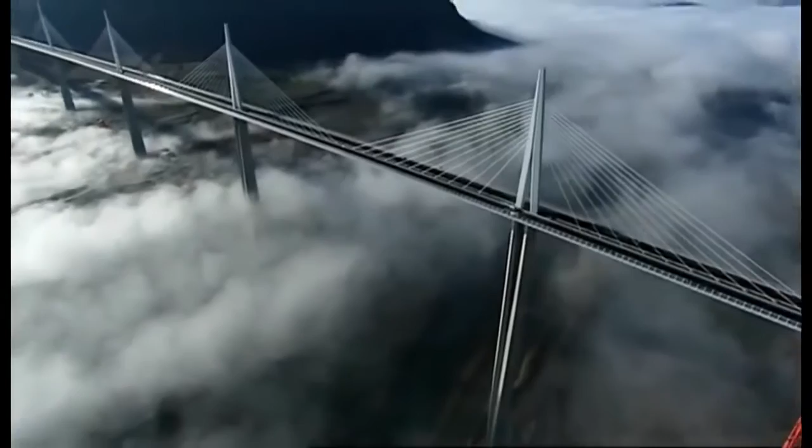This is the Millau Viaduct, the tallest bridge in the world. Its highest tower stretches a staggering 343 meters. So high, the bridge glides above the clouds. But this is a megastructure they said couldn't be built. When I've shown first the drawing of this bridge, they really thought I was crazy.

The team attempting to build this amazing freeway in the sky had to survive landslides, fight winds gusting at 130 kilometers an hour, and weather massive storms as the bridge simply hung in the balance. It's a bridge that pushes the boundaries of engineering to the limits, and then beyond.

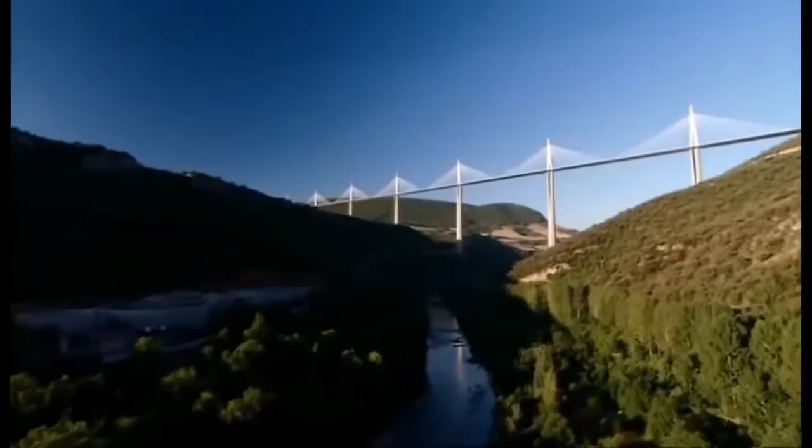Imagine building a series of Eiffel Towers, then slinging a 4-lane highway between them, all the way across one of the deepest valleys in France. Impossible though it sounds, that pretty much describes the building of the Millau Viaduct.

From the start, the construction team faced 3 daunting challenges. 1. Build the tallest bridge piers in the world. 2. Put a 36,000-ton freeway on top of them. And 3. Erect 7 steel pylons, each weighing 700 tons.

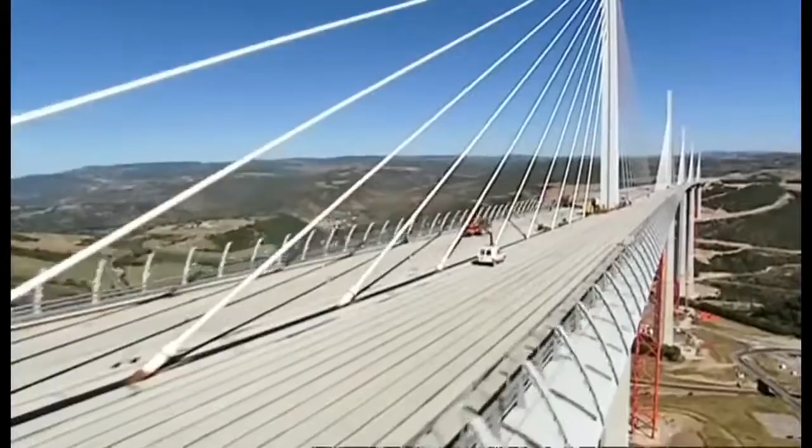And what's more, they had to do this hundreds of meters above solid ground. So high that if you were on top of the Eiffel Tower, you'd still be looking up at this awesome bridge.

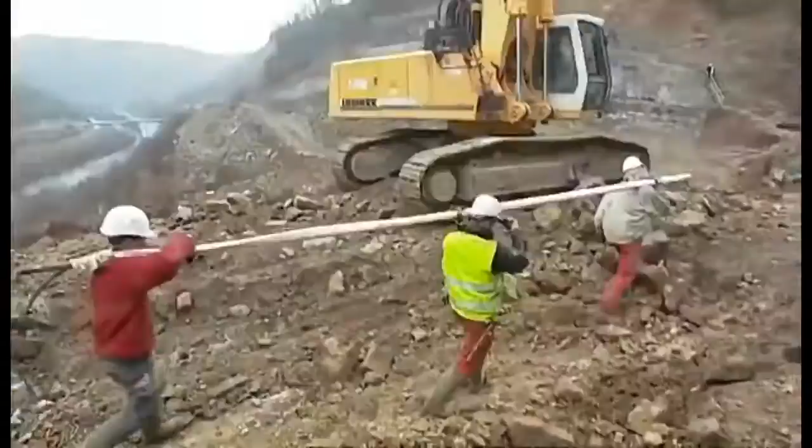October 2001, the team break ground. They're required to build a bridge that'll last for 120 years. And to win the contract, the teams promised to build it in record time, less than 4 years. By comparison, the world's longest suspension bridge, the Akashi Kaikyo in Japan, took a full 10 years to build.

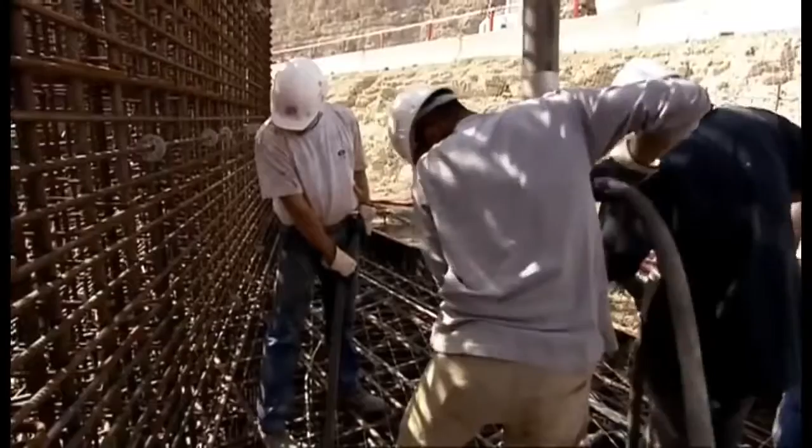To up the ante, any delay will cost them $30,000 a day in penalties. There are 7 piers that are numbered from the northern end of the valley. Number 1 will pose problems because of the steep slope. Number 2 will be the biggest challenge since it's the tallest. Crossing the river, number 3 is not much shorter. Then 4, 5, 6, and 7 climb the gentler slope to the south.

To begin, the team had to bury the foundations deep in the bedrock in order to support the enormous weight the bridge will place on them. But the forces of nature were stacked against them.

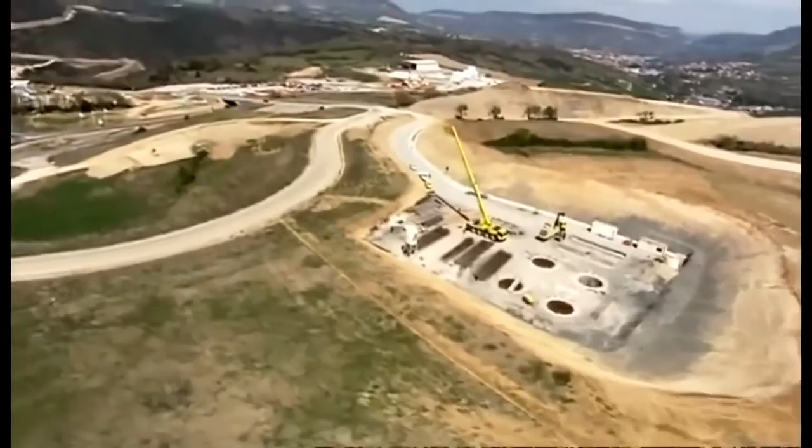Geologists have warned of the risks posed by the region's fractured limestone. The rock is full of cavities that are essential to the local cheese economy. These cave systems, close to Millau, are home to a unique bacteria responsible for the blue mold in the world-famous Roquefort cheese. But what's perfect for cheese could be disastrous for a megastructure.

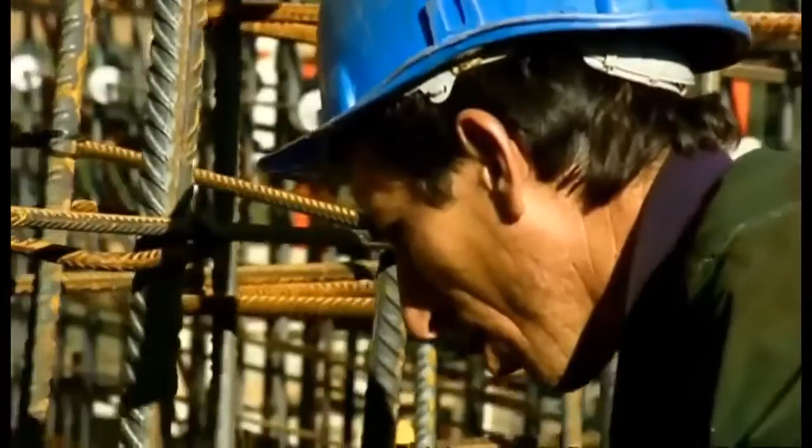The geologist's diagnosis spelt one thing: landslides. This kind of catastrophe could jeopardize the entire project. Despite the warnings, building went ahead as planned. Then, well into construction, as predicted, a dramatic storm causes a landslide. 4,000 cubic meters of rock collapse around Pier 1.

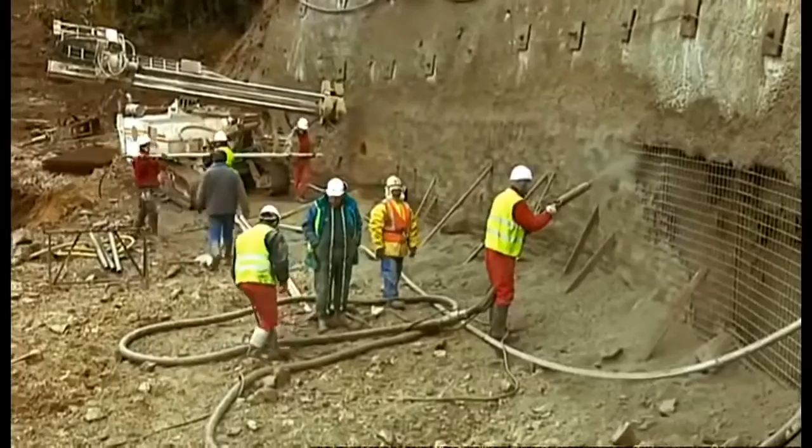Fortunately, the fallen rock doesn't damage the pier, but the warning is clear. They're forced to divert precious manpower and equipment to stabilize the slope and prevent a repeat collapse. So if the area is prone to landslides, why did they build the world's tallest bridge here in the first place? The answer is simple.

In the 1980s, France built a freeway linking Paris directly with Spain. This major artery headed south across the French countryside, while from the Mediterranean, the freeway headed north, until they both hit one of the deepest valleys in France and stopped dead. Welcome to Millau, France's least favorite bottleneck.

The town of Millau is in the mountainous region of the Massif Central, one of the most tranquil parts of France. But in summer, this poor medieval town suffered traffic hell. The locals couldn't take it anymore. Neither could their mayor. It was terrible for our reputation. When you hear every day on the television and radio, avoid Millau, there's a traffic backup, a 5-hour wait in Millau.

And it's not just the people of Millau. Two drivers, Jamila and Jemima, crossing the 30-odd kilometers between the freeway on either side of Millau, reveal exactly why this bridge is needed. Jamila, in car 33, will cross the new bridge, while in car 22, Jemima will take the old road across the valley floor.

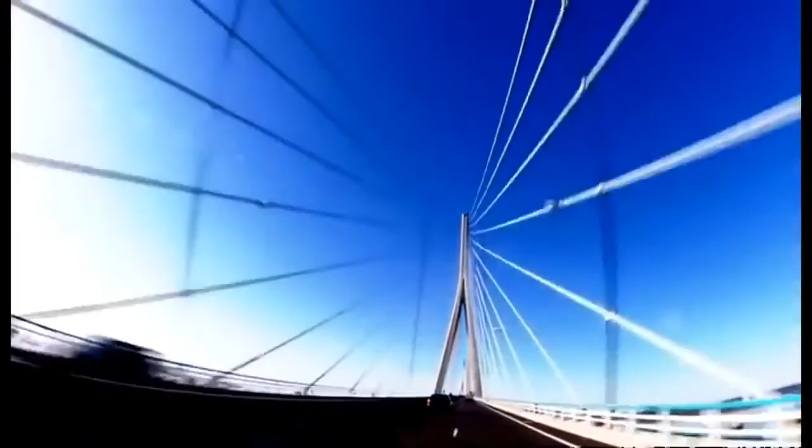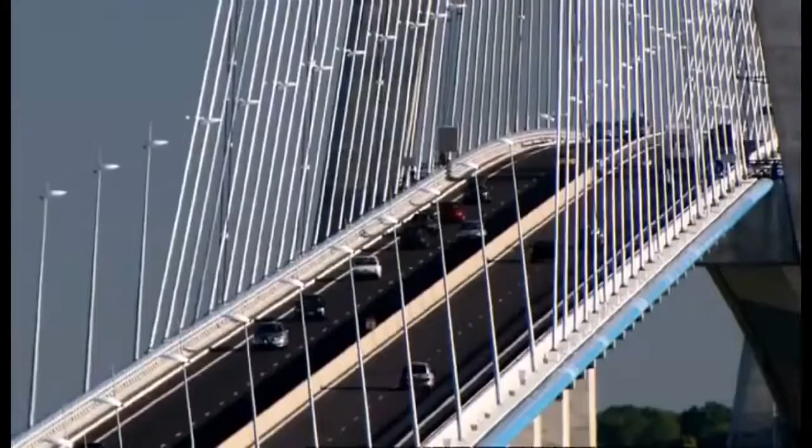Virlogeux's Normandy Bridge has 2 sets of cables supporting the deck. But he wanted to up the stakes for Millau by losing 1 row of cables, so the remaining line would be forced to do twice the work. More dramatically, the 2.5-kilometer Millau Bridge, instead of having a single main span, needed a whole series of piers to support it across the valley. No bridge builders had ever attempted a multiple-span, single-line cable-stay bridge on this scale before.

The French authorities had a problem. Nervous about Virlogeux's groundbreaking scheme, they held a competition inviting other engineers and architects to compete with different designs. The winner, Lord Norman Foster, is one of the world's superstar architects. In Hong Kong, he built the world's largest airport terminal. In Barcelona, offices literally hang from a mast on his communications tower. This is a man who regularly contemplates the impossible and delivers.

You know, it's the challenges, and it's one challenge on top of another, on top of another. And with Millau, one of the biggest challenges was making it fit into the landscape, given it's just down the road from the famous Gorges du Tarn, France's equivalent of the Grand Canyon. How do you make something which has to be so immensely strong against the forces of nature look very gentle, very delicate? How do you weave something on that scale into the most unbelievable landscape?

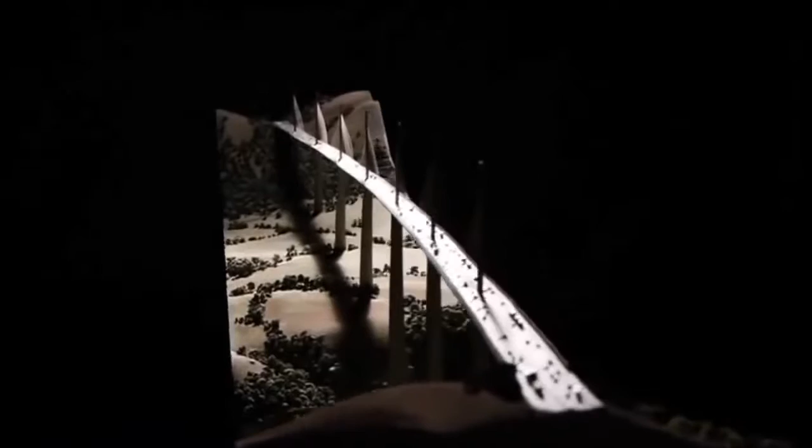Ironically, Foster's answer was to take Virlogeux's pioneering scheme, then push it one stage further. He turned an elegant piece of engineering into a delicate work of art by boldly cutting out 2 of the 9 original piers and seriously slimming down the remaining piers and road deck. Foster wanted the bridge to appear as delicate as a butterfly, but this butterfly has to support the weight of 5 Eiffel Towers in gale-force winds hundreds of meters above the River Tarn. Getting the design wrong would be a disaster.

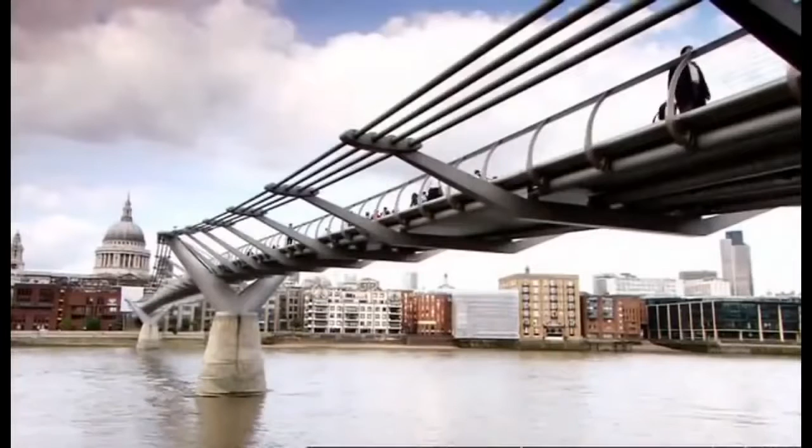Then, with Millau still on the drawing board, Foster's record as a bridge builder suffered a major setback. His Millennium Bridge in London is actually another record-breaking structure, the lowest profile suspension bridge in the world. But when this footbridge opened to the public in June 2000, it was a public relations disaster. Crowds walking over it set up a resonant frequency, and the bridge began to sway. As people adjusted their step to the small initial wobble, the effect was magnified.

Though it didn't threaten the structure, the swinging motion became so dramatic, the authorities closed the bridge for a refit that took 1.5 years and ended up costing over $8 million. It was a bad omen for the Millau Bridge, where construction was soon to begin. And at 15 times the height, a design flaw would be a catastrophe.

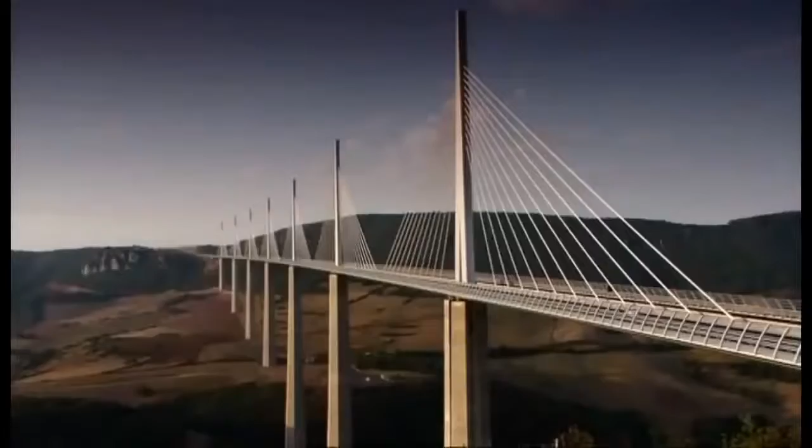December 2001, France's Millau Viaduct, the tallest bridge in the world, is under construction. Everything about this project is supersized. It'll need 200,000 tons of concrete, so much that the team have to build a concrete factory on site. But there's nothing straightforward about this concrete. The formula must be just right. It needs structural strength to support the massive loads it'll have to bear.

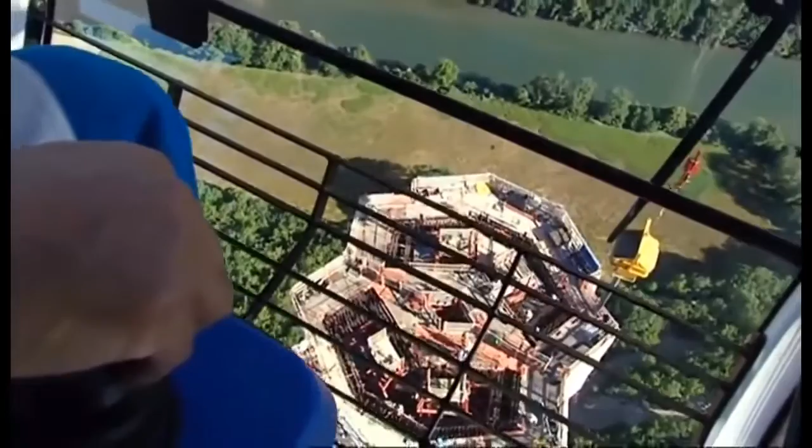But it can't set too quickly, as it has to be hoisted into position and poured hundreds of meters in the air. And it needs to be just the right color to suit Norman Foster's vision. In fact, the architect's vision has created a headache for the construction team. He's designed each pier as a complicated geometric shape, tapering the entire way up with vertical grooves set into them to create shadows. But what's just a line on paper for the architect was a major challenge to build.

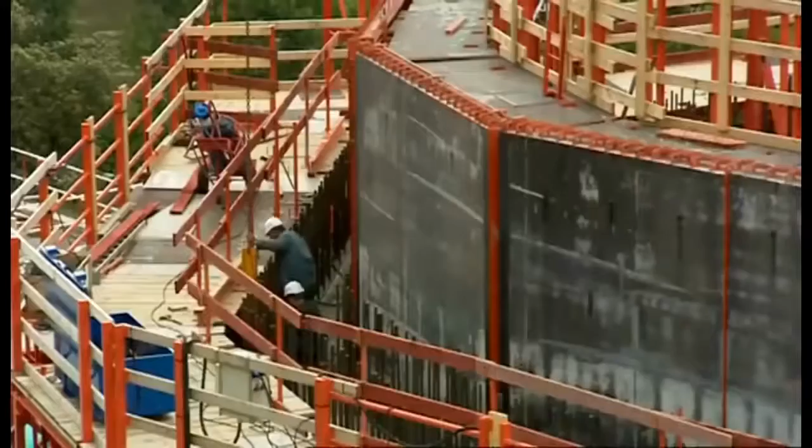The enormous piers are built step by step by pouring concrete into a temporary mold. To give the required strength, the molds are filled with a frame of steel reinforcing bars. In total, 16,000 tons of these steel bars are hoisted into place and secured. Laid end to end, they'd stretch the 4,000 kilometers from Millau all the way to Central Africa.

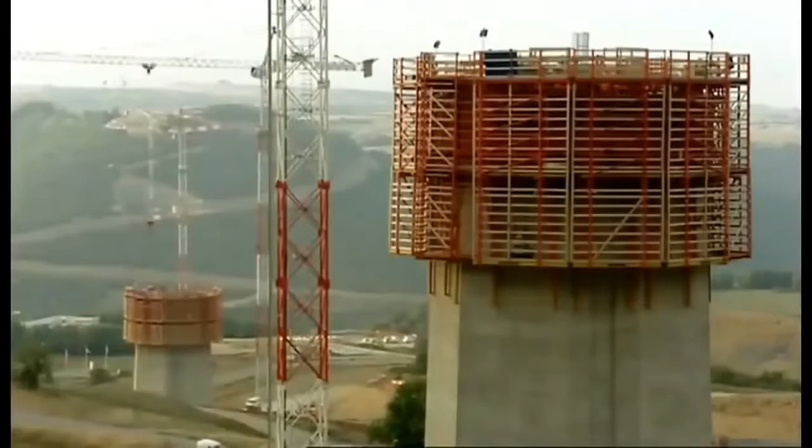The shape of each pier is seriously complicated. As a result, each time they remove the sections of red steel shuttering, they have to change the shape of the mold to fit the profile of the next 4-meter section. Manhandling these steel panels, weighing up to 15 tons apiece, is no picnic. And with the combined height of the 7 piers totaling well over 1 kilometer, they have to change the shape of the mold over 250 times.

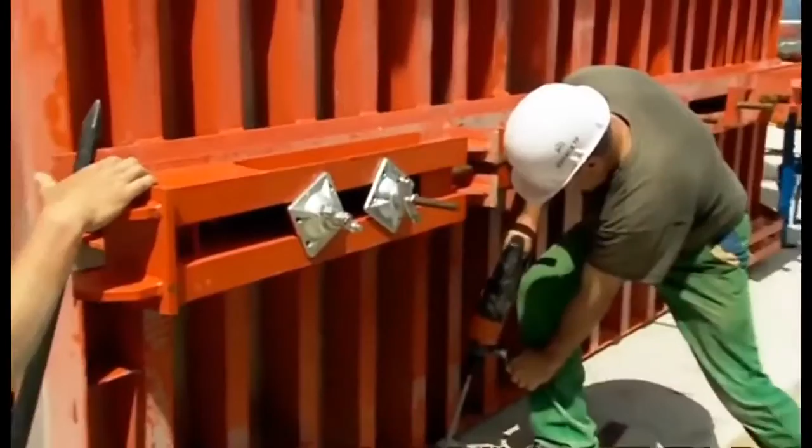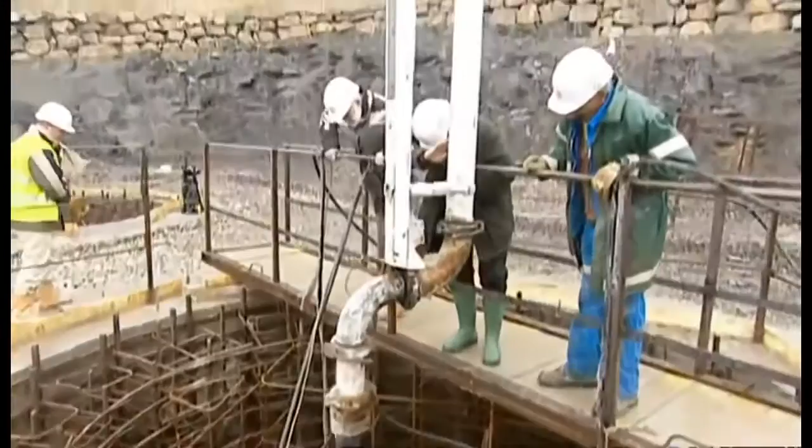Every 3 days, each team on each pier went through this whole cycle. Then they repeated the process. But it was a race against time, with a permanent threat of delay. Keeping the entire build on time and to budget was the daunting responsibility of one man, Jean-Pierre Martin. If instead of 3 days we took 4, imagine that multiplied by the number of castings. We'd end up with a 3 or 6 month delay. With a penalty of nearly $1 million a month, this isn't something Martin wanted to contemplate.

And this schedule wasn't his only headache. You have to be pinpoint accurate when you're building the tallest bridge piers in the world. Get it wrong, and the bridge simply won't fit together. Just 10 centimeters out, about a hand's width on each 4-meter section, and the tallest pier could be 6 meters off at the top, the width of a jumbo jet fuselage.

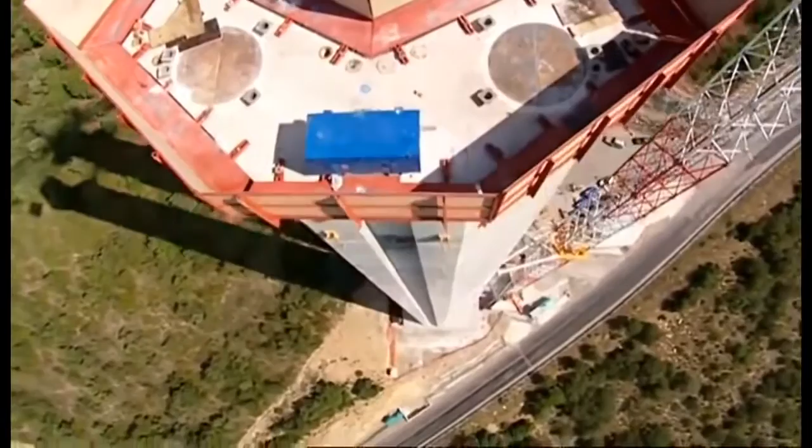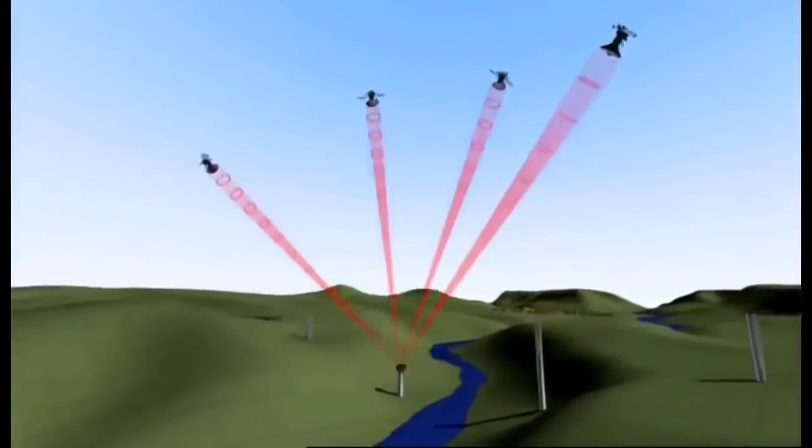Each team was aiming for a specific point in the sky. For Pier 2, this was exactly 245 meters above the ground, 546 meters from the north side, and 1,914 meters from the southern end. There was no room for error. The only chance they had to get it right was with GPS, accurate to within 4 millimeters. Using signals from multiple satellites, the team could pinpoint their position and make sure they're on target for that critical point in the sky they needed to hit.

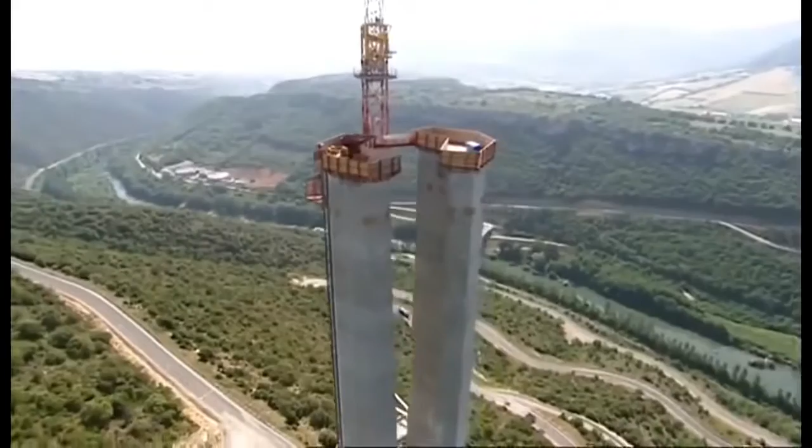Month after month, the piers climbed higher. Finally, by November 2003, they reached their full height. At 245 meters, Pier 2 becomes the highest bridge pier in the world. But is this record-breaking pillar where it's supposed to be? Amazingly, it's dead on target, to within 2 centimeters. Champagne corks pop. It's time for a major celebration. Against all the odds, they were 1 month ahead of schedule, but the team couldn't afford to relax. The next stage of the project would be the most difficult part of the build.

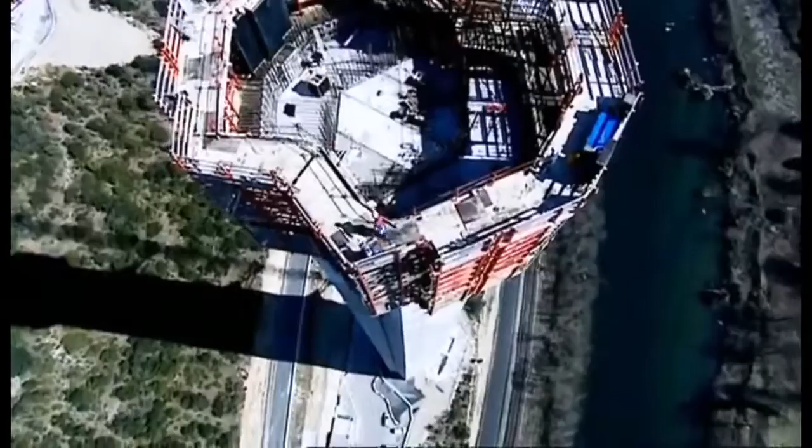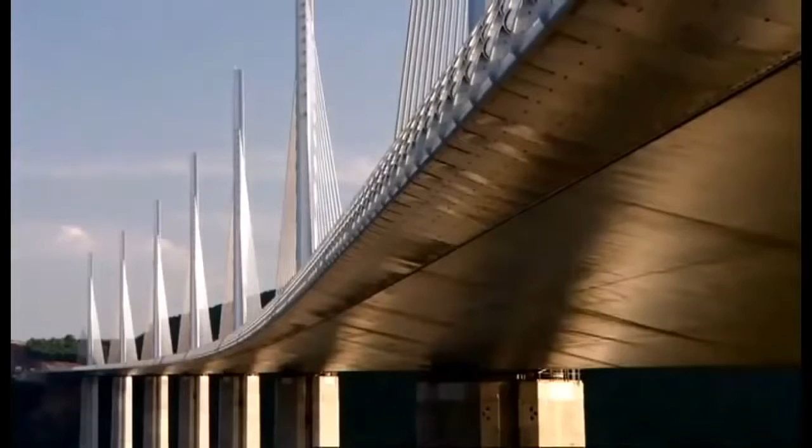With these fatalities in mind, the team decided to fabricate the entire road deck on the safety of solid ground. This meant building it in steel, which in theory would be much safer than lifting vast concrete sections hundreds of meters into position. There's only one problem with this plan. No one had ever put a road deck on piers anything like this height before, let alone over a 2.5-kilometer span.

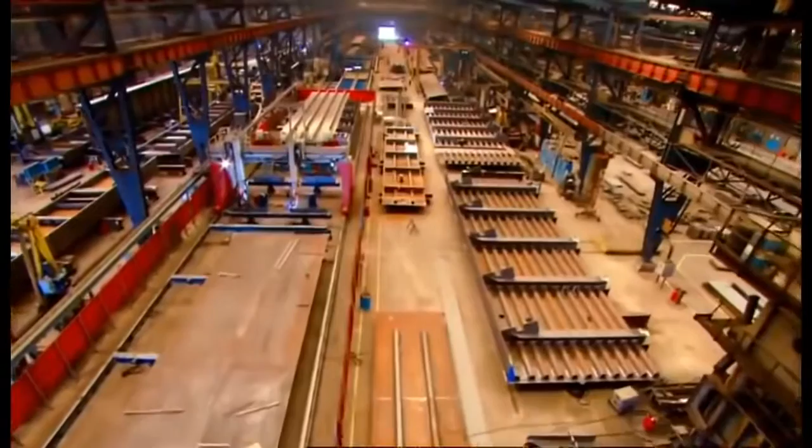In the end, only one steel manufacturer had the courage to take on this colossal challenge. Eiffel, the steel firm set up by the great French engineer. Eiffel built what was once the tallest bridge in the world, the Garabit Viaduct in southern France, before getting round to the framing for New York's Statue of Liberty and, of course, his signature tower in Paris. But despite the company's experience, Eiffel's director, Marc Buonomo, knew he was taking a serious risk. It was a gamble for the company, because if there had been a mistake, if it hadn't worked, it would have been the whole company.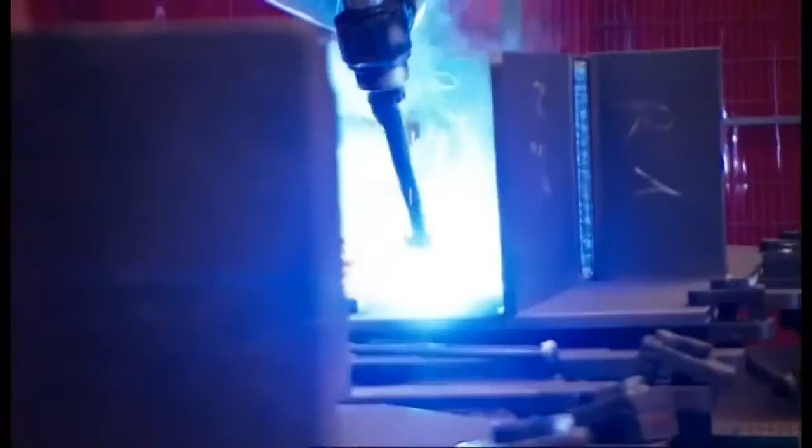They fabricated the massive sections that would make up the road deck in the company's steel factories. This immense jigsaw puzzle involved manufacturing 2,200 separate sections, weighing up to 90 tons, and some of them 22 meters long. Their accuracy is measured with a laser to within a fraction of a millimeter.

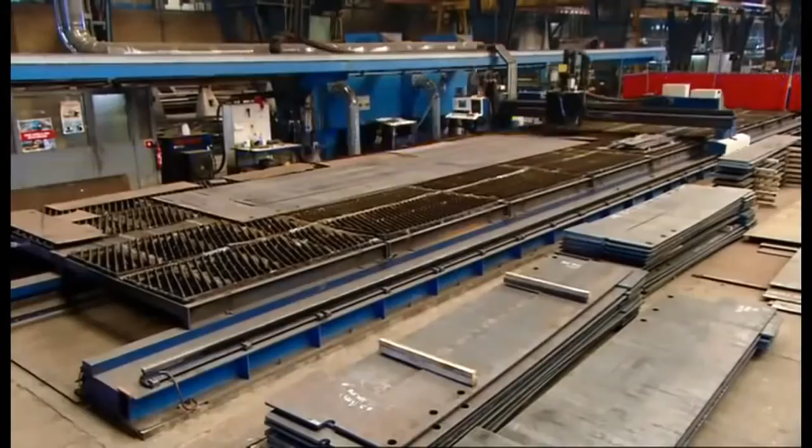The huge square tubes are the central spine that should make the deck rigid. The triangular side panels will be welded on either side to create the width for a 4-lane highway. To meet the punishing schedule, Buonomo automated the manufacturing with a 2-headed welding robot and a plasma cutting machine.

Each cutting pattern or template is programmed into the computer. Then the machine automatically blazes its way through the steel. The torch reaches a scorching 28,000 degrees centigrade. That's 5 times the temperature of the Earth's inner core.

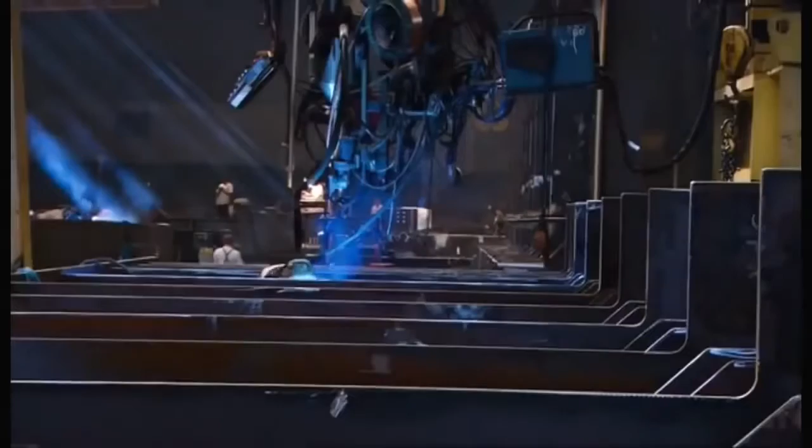But cutting and welding was the easy part. The hard part was getting these monster sections the hundreds of kilometers from the factories to Millau. The routes had to be planned with precision to avoid major damage. The police coordinated safety and clearances. Even with that level of preparation, some obstacles felt as if they're cutting it just too close for comfort.

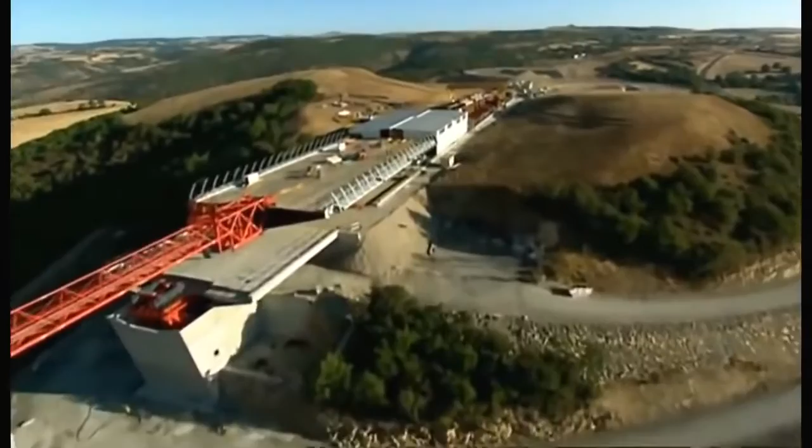And this was no one-off event. To build the viaduct took over 2,000 of these extraordinary road convoys. The components arrived at assembly plants set up, one on either side of the valley. Here, the pieces of a massive jigsaw puzzle were welded together to form the 2 halves of the deck.

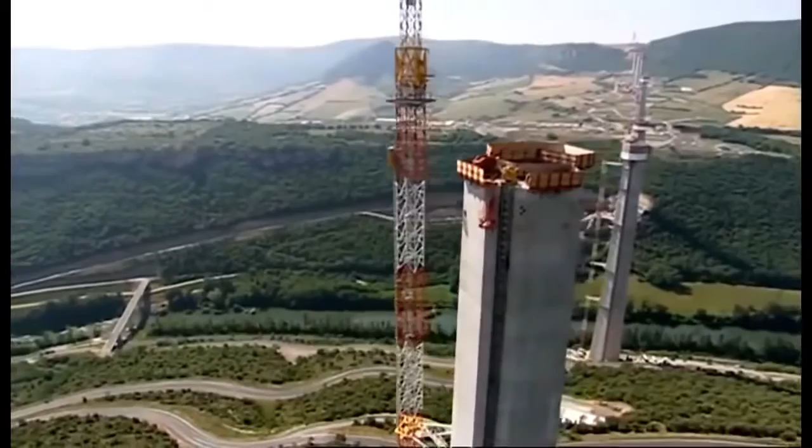But getting these 2 halves to span the valley on top of the world's tallest bridge piers would be a major challenge. They'd be the first team to put a road deck on a pier taller than an 80-story skyscraper. And pushing bridge building beyond anything attempted before, they planned to slide the entire 2.5-kilometer road deck over in 2 colossal pieces. The bridge's chief engineer, Jean-Marie Cremer, was one of the few people who believed it could be done.

All the engineers who know this method, who were in the know, didn't believe it was possible. If the team had got their calculations wrong, the entire structure could collapse into the valley. We found a solution for the construction, which was to launch the bridge from the 2 sides. One part on the Larzac Plateau, one on the Rouge Plateau. And to push them from the 2 sides and to make them come and meet here above the River Tarn.

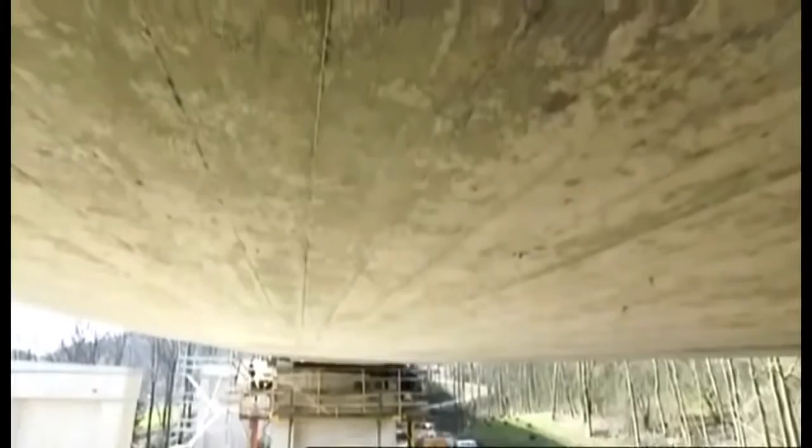Smaller bridges use a similar technique. A powerful set of hydraulic rams literally pumps the deck from one side to the other. But Millau would be the longest launch ever attempted over the highest piers in the world, and the results could spell disaster. The deck is so slender, it would bend and collapse if it were pushed out over the 342-meter spans between each pier. The furthest anyone's previously managed is less than half that distance.

The first part of the solution was simple. Fit a pylon so its cables support the front of the deck as it goes out over the valley. Then construct temporary steel support towers that halve the spans to a more manageable 171 meters. These steel towers were a construction feat in themselves. The largest, over 170 meters high, is the tallest ever built, and they needed to carry a massive load.

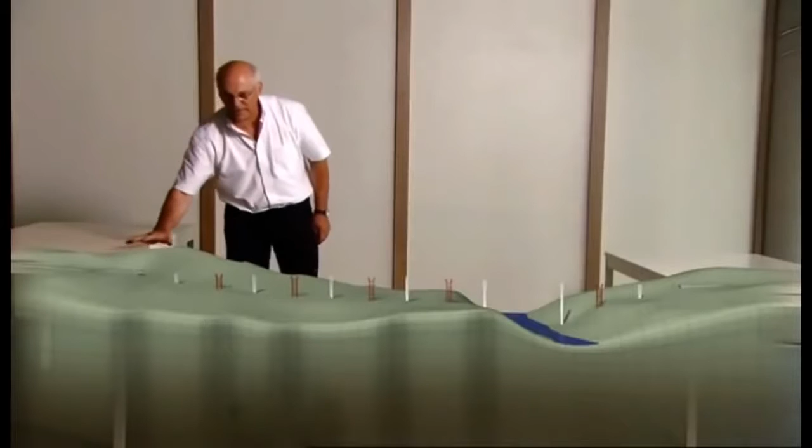7,000 tons as the leading edge of the deck, together with the first 90-meter pylon, slide over. And simply pushing this enormous weight over the top of the vulnerable piers would bring them crashing to the ground. This was the nightmare scenario. If we'd done a conventional launch, we would have knocked the piers over like the pins in a bowling alley.

Someone needed to reinvent the way this type of bridge is built. And it's Marc Buonomo with Jean-Marie Cremer who came up with the breakthrough. The basic principle can be demonstrated with a heavy box and a wobbly table.

With a normal launch, you knock over the piers. I want to advance the deck over the pier, but if I push the deck from here, I'd knock over the piers, because they're so tall.

The idea is to install a launching system on top of the pier, and that way, if I push the deck, it has no effect on the stability of the piers, and the piers won't fall over. The trick is to use a series of these launching systems to jack up the deck and inch it forward.

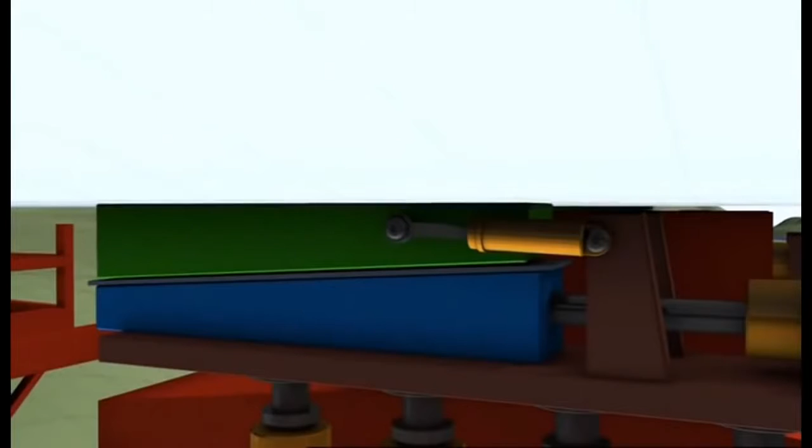Each system uses two wedge-shaped blocks under each side of the deck. The upper wedge is pulled forward by a hydraulic ram. It slides up the slope of the lower wedge, at the same time lifting the deck from its supports and advancing it 600 millimeters. The lower wedge then retracts, dropping the deck onto its supports. The upper wedge returns to its original position, and the whole cycle begins again.

4 of these clever devices are placed on each pier, all programmed to work at exactly the same time. The result is that together, they pick up the entire roadway and shunt it forward. But if one fails or gets out of step, it could spell disaster. The force could push the bridge piers apart till they collapse.

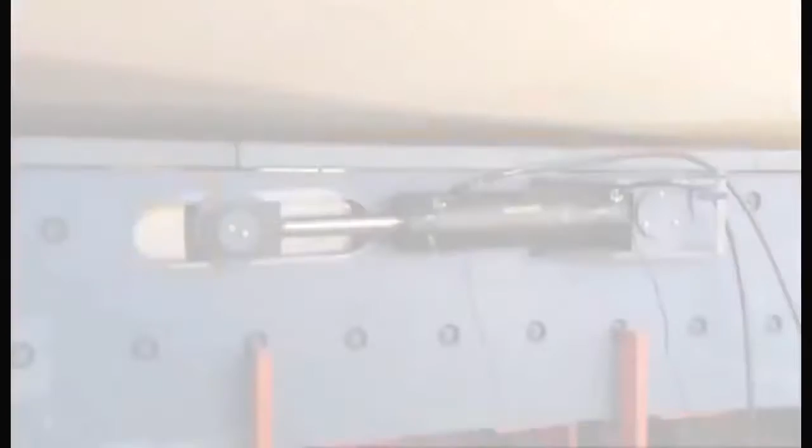When you're up there and you see Millau 300 meters below you, you ask yourself, was this a good idea? The future of the entire project was now hanging on a prototype, and it had never been tested.

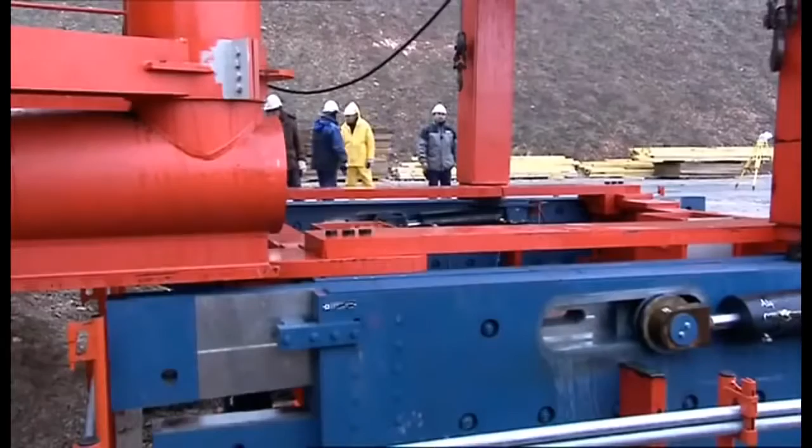It's the morning of February 26, 2003. Do or die day for the world's tallest bridge. Everything is about to be put to the test. The flexibility of the deck, the strength of the temporary piers, and critically, the pioneering hydraulic ram system. Even Buonomo, the man in charge of the launch, had his doubts. As it had never been done before, I have to tell you, I had fears that it wouldn't work.

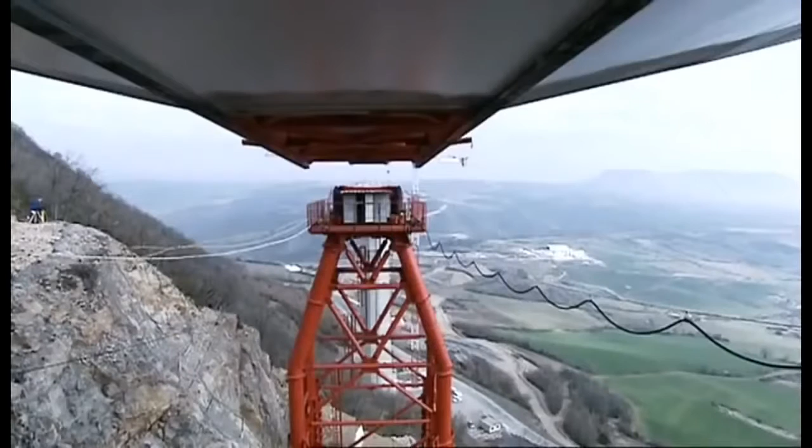The pumps kick in, the pistons start to push, and the deck begins its huge journey across the valley. The moment I heard the motors start, I put my finger on the deck, and I could feel my finger move. Every 4 minutes, the deck advanced 600 millimeters across the valley. Surveyors tracked its progress. But it was still a nail-biting time as they watched the unsupported deck crossing the void.

Eventually, the deck reached the safety of the first pier. 204 meters down, only 2,256 to go. The launching system seemed to be working as planned. The engineers were feeling optimistic. But as the deck advances into space, it'll become more vulnerable to the wind, which can reach 130 kilometers an hour.

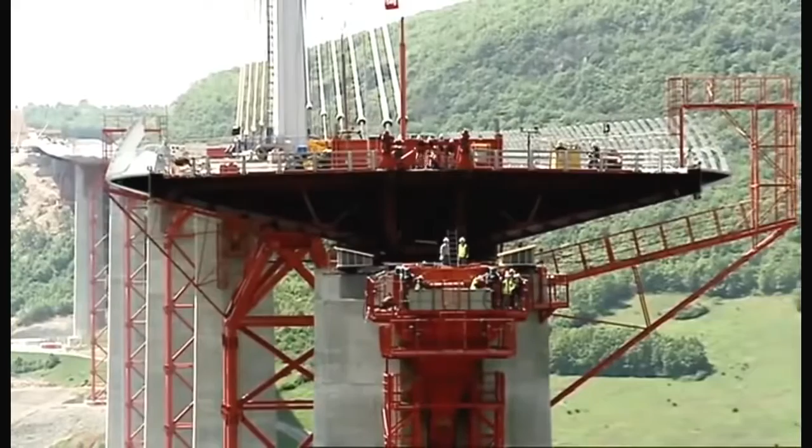Unfortunately, the road deck has the shape of an upside-down airplane wing, and the team's greatest fear is that this wing could simply take off. The engineers kept a close eye on the wind and weather conditions. When they were satisfied there was a 3-day weather window and the wind wouldn't exceed 85 kilometers an hour, they'd give the construction team the go-ahead, and the deck launch could continue. The reason for this precaution is simple. Strong winds can literally tear a bridge apart.

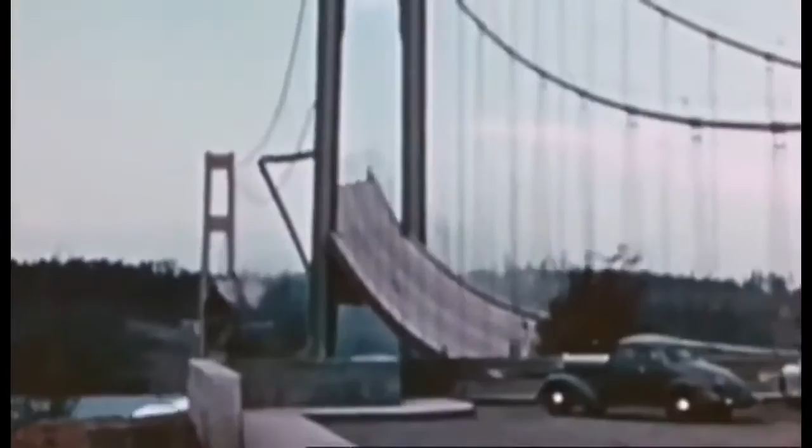In 1940, Washington State built a suspension bridge across the Tacoma Narrows in the US Northwest. It opened with a grand ceremony on July the 1st. But the celebrations were short-lived. The bridge had a major problem: the wind. Girders beneath the deck, designed to make the bridge rigid, actually blocked the wind, causing the roadway to ripple alarmingly. Locals soon dubbed it Galloping Gertie.

On the 7th of November, with the wind less than 70 kilometers an hour, the bridge begins to twist violently. At 11 a.m., time runs out for Galloping Gertie. The wind sends the bridge crashing into the river. Wind tunnel testing is now standard procedure as a direct result of Galloping Gertie.

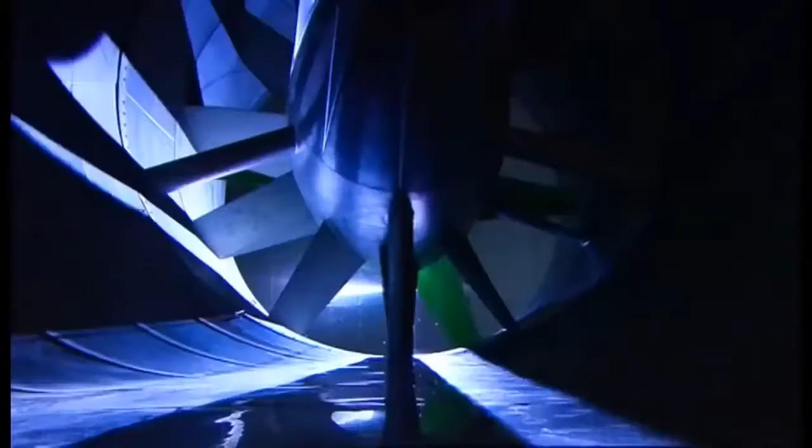For the Millau Bridge, they analyzed the wind in the Tarn Valley over 18 months, then recreated those conditions in the wind tunnel. Wind engineer Olivier Flamand was shocked by the results. The average wind speed was relatively low, but because there's such strong turbulence, it created very fast peak winds. The rugged terrain creates serious turbulence at the height of the road deck. Winds peak at 130 kilometers per hour. That's hurricane force.

They tested every aspect of the bridge to analyze the risks: piers, pylons, and critically the deck. But it's not just the aerodynamics of the finished bridge. They needed to find out how it would behave when it was most at risk, during the launching of the deck.

Olivier and his team reached a chilling conclusion. The winds they've measured are strong enough to blow the unsecured deck off its supports and send it crashing hundreds of feet to the valley floor.

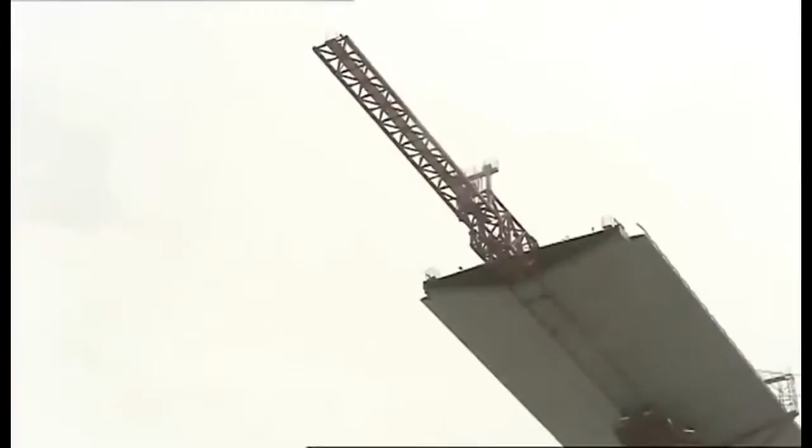And then the nightmare began. On the 22nd of August 2003, 6 months into the deck launch, one of the launch systems failed, leaving the deck hanging in the wind. To make matters worse, the weathermen were predicting storms.

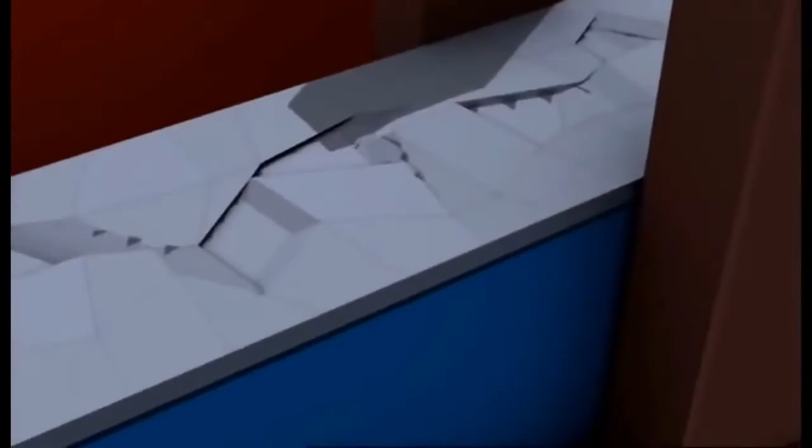So far, these massive pumping machines had worked perfectly. But the fact is they were prototypes, and due to the frantic schedule, they'd never been tested. The problem was that the non-stick Teflon between the sliding surfaces had ripped, and the friction generated was too much for the hydraulic rams to push against.

Unfortunately, no one had planned on replacing parts of this monster machine mid-launch on the top of a massive concrete pillar. This was very bad news for the man who staked his reputation on this system. It was maximum stress, like poison in your mouth. You don't forget that.

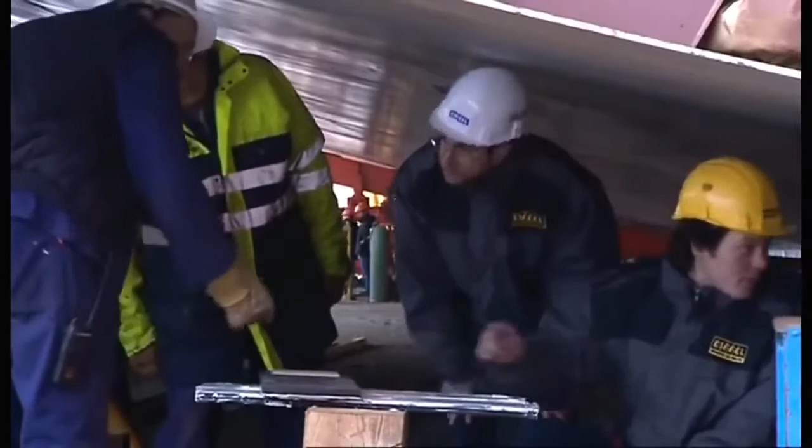Re-examining their calculations, they realized the cause of the problem. They'd underestimated the forces between sliding surfaces, but they wouldn't be able to repair it without the necessary spare parts. The clock was ticking, and Marc Buonomo needed a solution fast. When Apollo 13 came back with that incident, the NASA engineers requested they did the inventory of everything there was on board to know how to fix it.

The Millau team did an inventory. They realized that the other launching machines, not yet being used, could be stripped to provide the new Teflon surfaces they needed. Working all through the night, the team extended the access platform. This allowed them to take out the 5-meter-long, 2-ton steel wedges, replace the Teflon, and reassemble the launching machine. By 8 a.m. the next morning, it was ready to resume the launch.

The rest of the week, the predicted storms arrived, and another set of launching machines wore out. So when the deck finally made it to the safety of the next pier, the team breathed a major sigh of relief. You don't forget that. I won't forget that for 4 hours I was really scared.

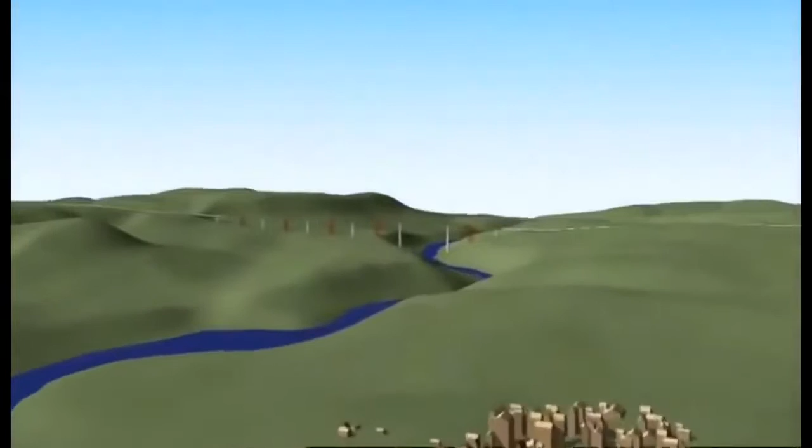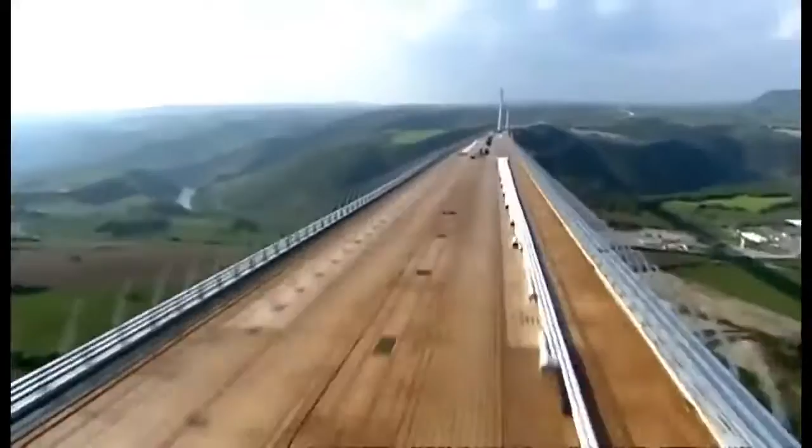The two decks continued their journey across the valley, day after day, week after week for a full 14 months. They approached each other, millimeter by millimeter. By May 2004, they'd reached a critical phase. From the northern end, the shorter deck had traveled 717 meters into space to reach its final resting place. From the south, the longer deck extended over 1.5 kilometers. Only the section over the river, the one point where it was impossible to erect a temporary pier, divided them.

But would they meet as planned? If they've got their calculations wrong, they'll have built the biggest white elephant in Europe. Even the man behind the whole project had his doubts. I was not convinced at all that the two parts of the deck could meet exactly with a perfect geometry. The odds were against them. Calculating such a feat so precisely is a Herculean task.

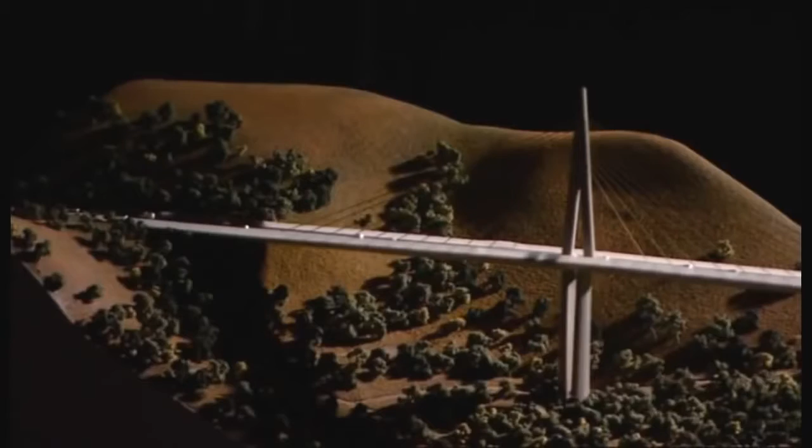Firstly, the two starting points on the northern and southern slopes of the valley are at different heights. Secondly, the bridge has a subtle curve to it. As a result, each steel panel which makes up the road deck had to be cut and welded with extreme precision. It would be an engineering triumph if they got these two sloping curved decks to meet as required.

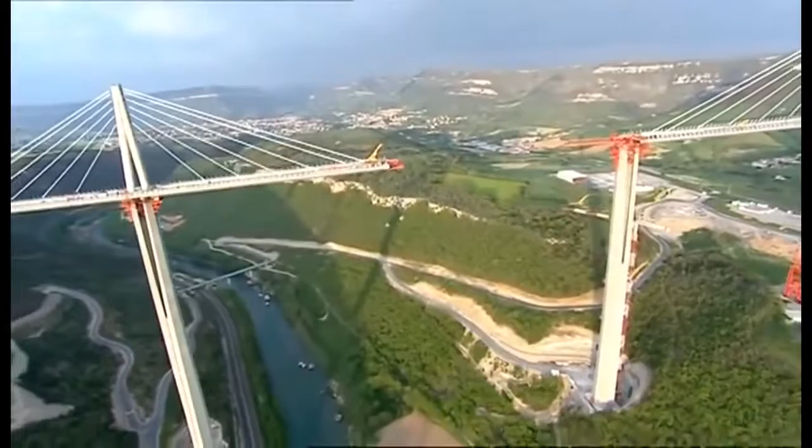The team checked the weather reports. With the wind inside safety limits, they gave the go-ahead for the final push. The rams began to drive the deck's leading edge off the safety of Pier 3 towards its destination. At this point, a total of 21 launching systems needed to move at exactly the same moment to avoid disaster. If anything were to go wrong now, the man responsible would be Marc Buonomo.

Everyone asked me, how can you be sure that it will go straight? So to be sure that they were going to the right place, I had a GPS put on the front, so I could see the gap between the theoretical and the real position.

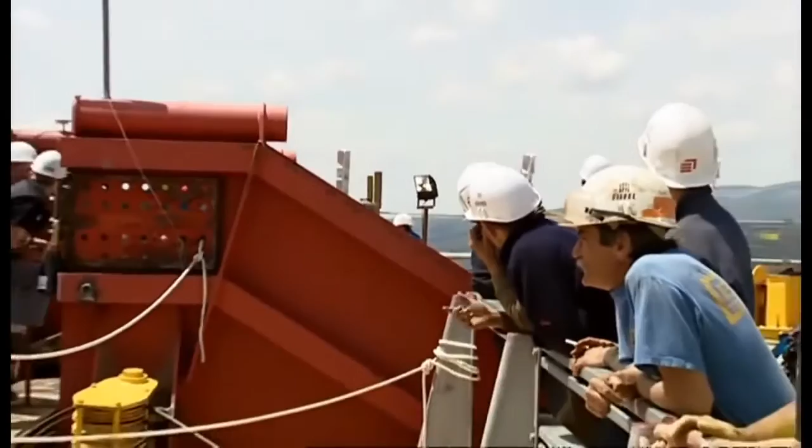Over the next 2 days and nights, the deck advances 600 millimeters at a time towards its final resting place. The world's media are watching the critical meeting of the decks, and to add to the pressure, the French Prime Minister is due to drop in to celebrate the event. The deck pushes forward, now with only centimeters separating the two sections. A magnum of champagne is hung between them to mark the moment.

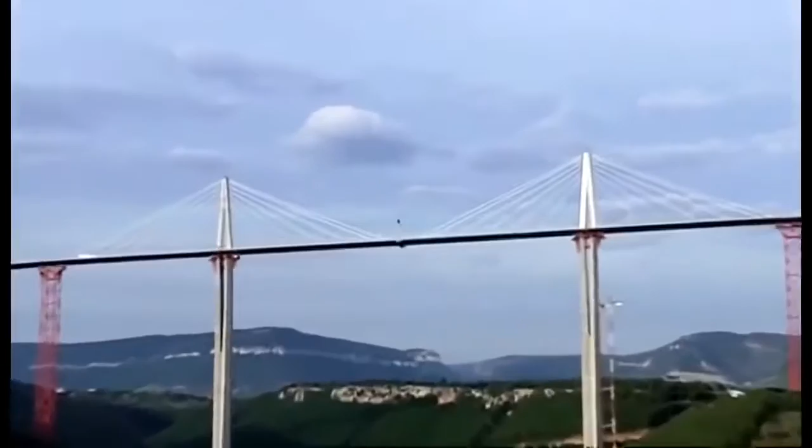At last, union. The two massive steel decks have traveled high over this valley, a total of 2.5 kilometers, and when they check, they're aligned to within 1 centimeter. That's accurate to within 99.9999%. All the measuring, all the calculations have paid off. They've nailed it.

The meeting of the decks was a special moment. News reports traveled round the world, and in Salzburg, Austria, they reached Felix Baumgartner, aka Felix the Conqueror. Felix has made a career base jumping from some of the tallest structures on the planet, and within 24 hours, he'd driven to Millau and was calculating the logistics for the jump, factoring in his two main aims, to avoid arrest and death.

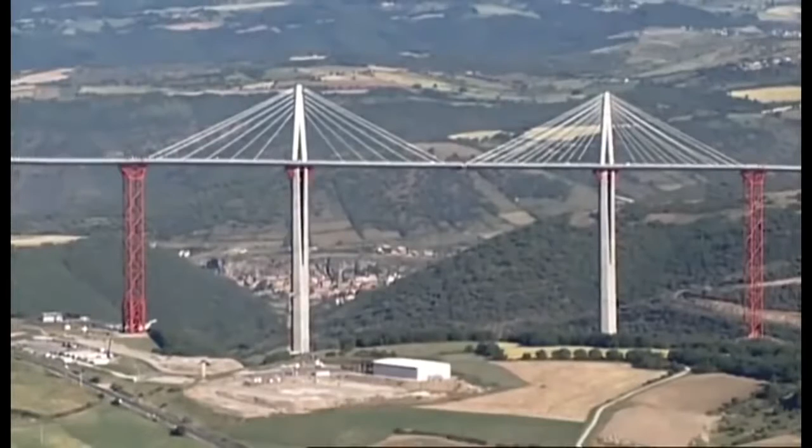Baumgartner waited for darkness before arriving on site. He found his way to the base of Pier 2, then climbed an access ladder the full 245 meters to the top. He entered the steel road deck and found a place to hide until daybreak. He had to remain concealed until the sun was high enough for his cameramen to record his world record attempt.

At 7 a.m. the following morning, Felix the Conqueror emerged. He took a cool backward flip off the tallest bridge in the world and entered the record books. The tallest bridge in the world, 250 meters. I did it. And having evaded death, he made sure he's not caught by the police.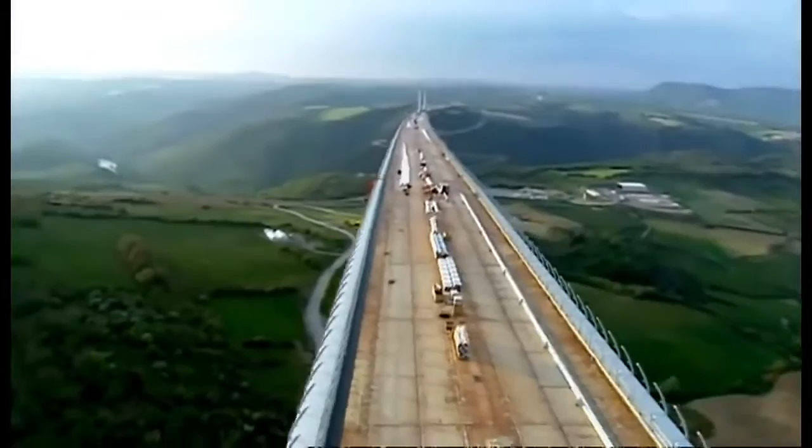The decks have been joined, and the team have reached the final phase of the project. But there was still a race to meet the schedule, and their problems weren't over yet. Everyone could see the dramatic undulations in the flexible steel deck. Even some hardened bridge builders wondered about its structural integrity. It was a huge surprise for everyone. All the engineers said, we knew steel was flexible, but not that flexible.

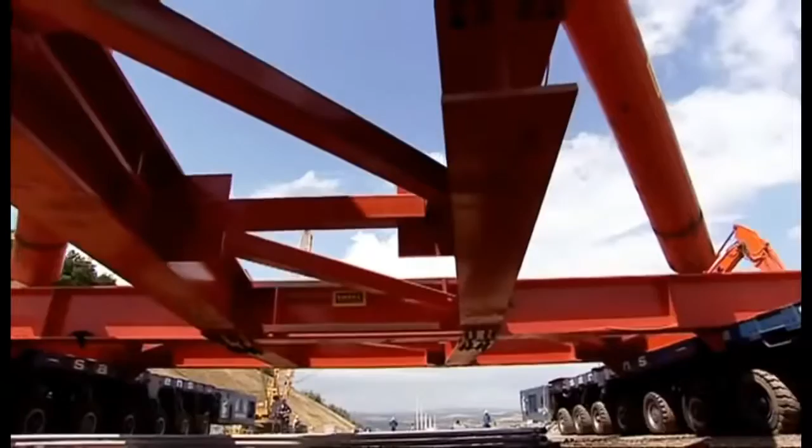The team were relying on the pylons and cables to pull the deck straight. Each massive pylon is 90 meters high and weighs 700 tons, the equivalent of 85 London buses. Placing them in position on the slender deck, high above the valley floor, would go beyond anything ever attempted. Once again, Marc Buonomo had a plan. You know, the first people to make vertical pylons were the Egyptians. Buonomo adapted a technique used in ancient Egypt to erect obelisks in the sands.

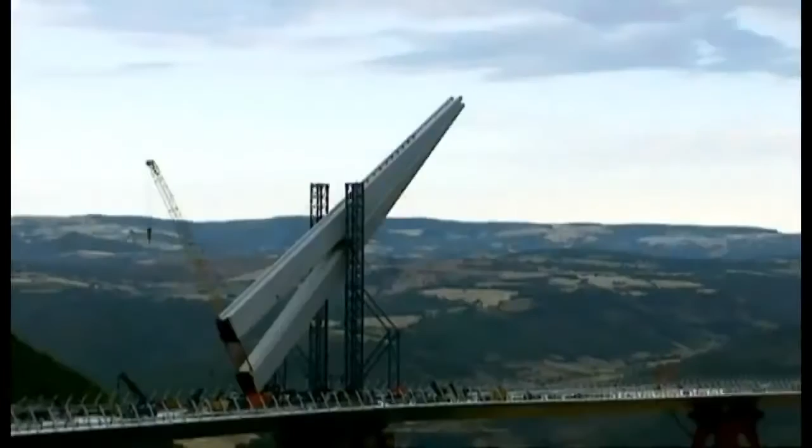On top of the road deck, the team put up two enormous steel towers, both of them secured by cables and equipped with a hydraulic system capable of raising 1,000 tons. The 700-ton pylon is then lifted by the hydraulics. As it rises, it pivots little by little until it's vertical. It's then lowered safely onto its anchorage point. Buonomo's 4,000-year-old technique worked to perfection.

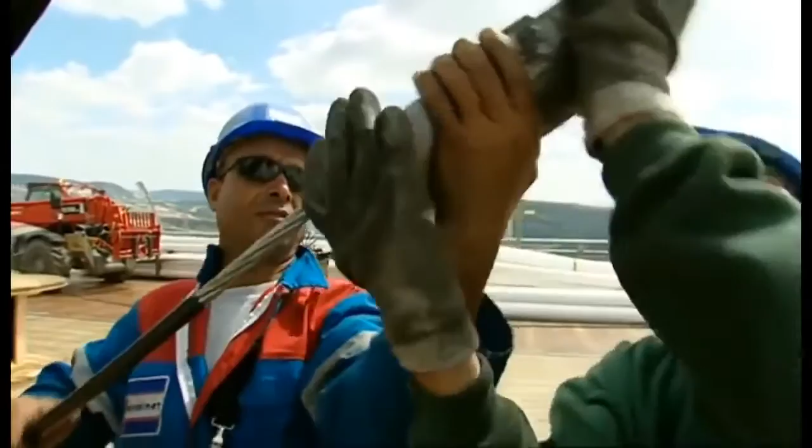With all 7 pylons in place, the team could attach the cable stays that would straighten the rippling deck and give it the strength to cope with full traffic loads. They hope. The weight of the roadway is now over 40,000 tons, the equivalent of a cruise ship, and the 154 cable stays should prevent it from sagging or collapsing. The strongest stays are made up of 91 individual steel strands and have a breaking strength of 25,000 tons, strong enough to hold back 25 jumbo jets, all at full throttle.

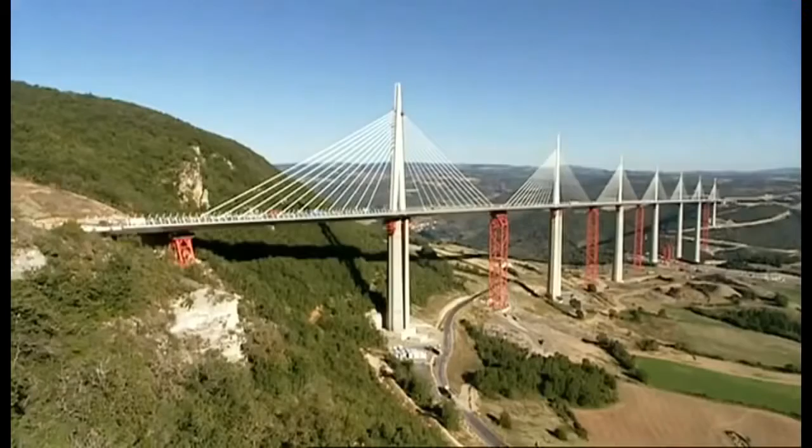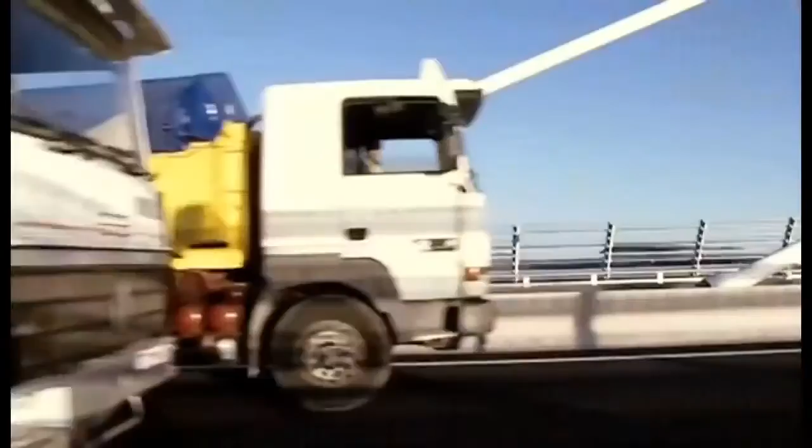As the cable stays are tensioned, true to plan, the ripples in the road deck are pulled straight. Over the 2.5-kilometer deck, the ripples are now no larger than the size of a thumb. They're finally on the home straight. The road surface goes on, adding a further 10,000 tons to the load. That's like driving 153 battle tanks onto the deck. But before it could open to the public, the team needed to know the bridge is safe. It would have to pass one crucial test.

After 3 years, the construction team building France's Millau Viaduct, the world's tallest bridge, are about to find out if they got their calculations right. On a single-span cable stay bridge like the Normandy Bridge, a large load on the main section is no problem because the cables are attached to solid ground and can't give.

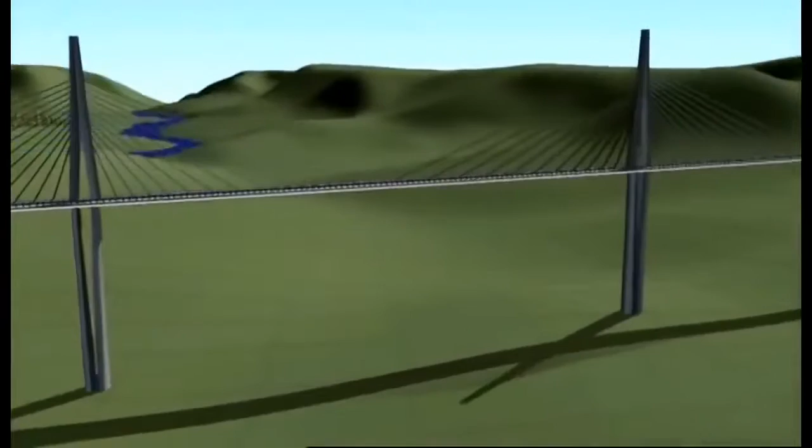On the Millau Viaduct, with its 8 spans, the cables are attached to the deck of the adjacent sections. A load on one section will cause it to drop, pulling the stays down. As the pylons lean in, the matching stays are pulled upwards, lifting the neighboring decks and causing a dangerous rippling effect.

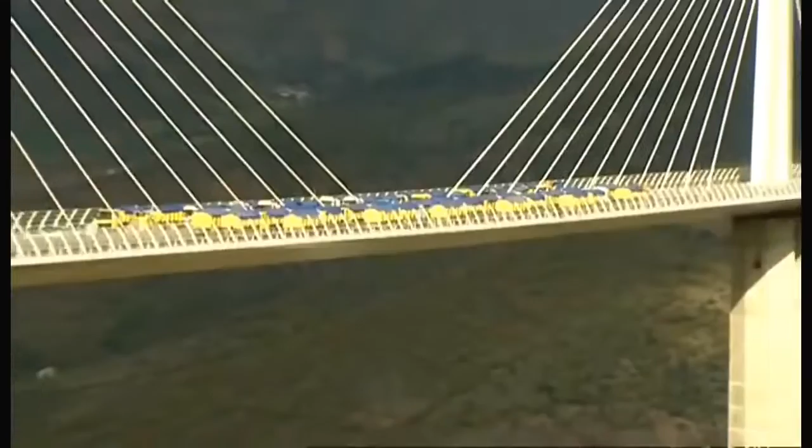It's right now the team put their bridge to the test. These 28 trucks have a combined weight of over 900 tons. They are now positioned in the critical point, mid-span. The engineers hold their breath. Measurements are taken. The span bends just 26 centimeters. This is a triumph for the engineers. The bridge was designed to cope with more than double that.

4 weeks later, on December the 14th, 2004, President Jacques Chirac officially opened the Millau Bridge. A proud moment for the whole of France. Just over 3 years of construction have produced the tallest bridge in the world, designed to last at least 120 years. And against the odds, the project manager even brought the job in on time. But that's not what he's most proud about. What I remember, because on construction sites there are often accidents, is that we had no serious accidents, nothing more than a minor injury.

As soon as it opened to the public, the bridge was an instant success. But the real test isn't till its first summer, when the French all take their annual vacation. No one ever expected anything like this. Numbers peaked at more than 50,000 vehicles a day. At over $7 per car, that's great news for the construction company, who are clawing back their $478 million investment in the project.

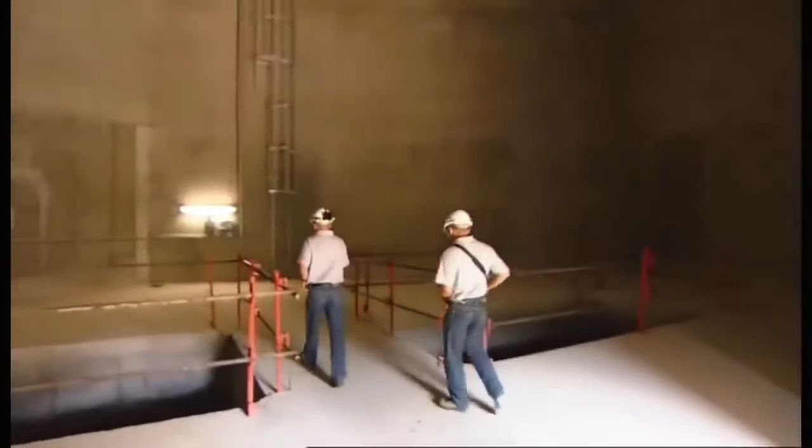This was an epic bridge to build, but it's just as epic to maintain. Thierry and Frank are assigned to P2, the world's tallest bridge pier. This structure is no solid concrete block. It's a series of vast hollow spaces. Their job today is to test the communication system and electric circuits on each of the 7 structural floors. This involves a 343-meter climb, going hand over hand up a ladder for the rest of the day.

By dusk, when Thierry finally reaches the summit of the pylon, he may be exhausted, but there is a payoff. You get a fantastic view from here, a 360-degree panorama. The tallest bridge in the world has become an icon. But this is creating problems no one had ever imagined. Locals have been taking over the bridge as a platform to get media attention for their causes. This crowd was hoping that driving sheep over this freeway in the sky would help them get more farming subsidies.

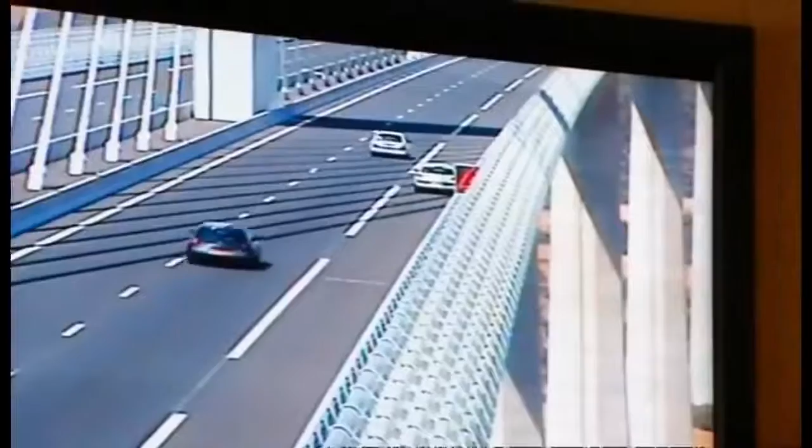Jose's job is to prevent this kind of incident from creating a danger, and on this bridge, the incidents keep on happening. An alarm triggered by a motion detection system means there's a stopped vehicle on the bridge. Immediately, Jose dispatches a colleague to deal with the situation. The last thing anyone wants is a multi-car pile-up on a 2.5-kilometer bridge, quarter of a kilometer in the sky.

Jose zooms in his camera to reveal the man has left his car and is sitting dangerously on the crash barrier. The driver's probably only broken down, but already one man who stopped climbed over the wind barrier and jumped to his death. Bruno intervenes. Thankfully, it's no more than an irresponsible photographer who's sent on his way.

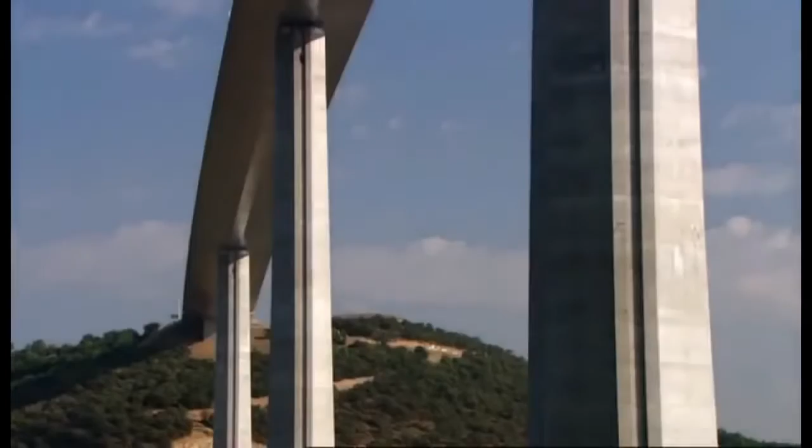You could say the Millau Bridge is a victim of its own success. It's definitely become a major tourist destination. 700,000 visitors in the first 9 months. Fortunately, most of them wait till they're off the bridge to take their photos. It's magnificent. I came 600 kilometers today to see the Millau Viaduct. There's only one thing to say. It's extraordinary. They're drawn because it's a world-beating structure, but also because it's incredibly beautiful, delicate, and minimal. Not what you'd expect from a structure that's nearly a third taller than any other bridge on the planet.

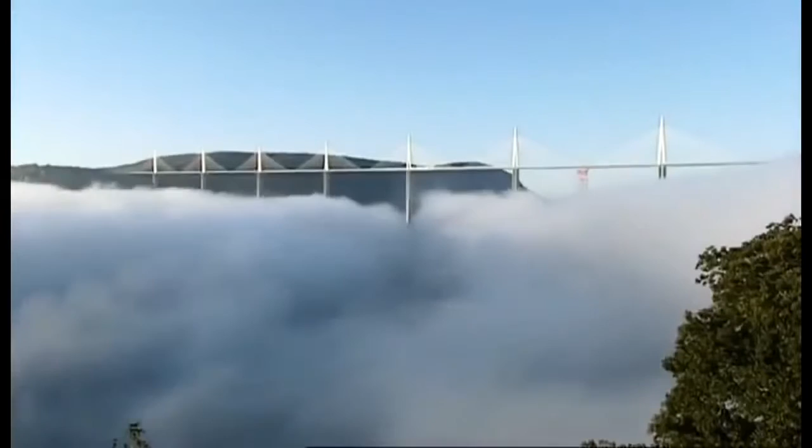And architect Lord Norman Foster's achieved his aim to give the driver the sensation of soaring. As you leave these plateaus, you do fly. You fly across this bridge. Literally, you are above the clouds. And the result certainly pleases the man who dreamt it all up. To see erected this bridge, which I imagined 15 years ago, it's something magic. This is the longest pure cable stay bridge in the world, the tallest roadway in the world, and of course at 343 meters, it is the tallest bridge ever constructed.